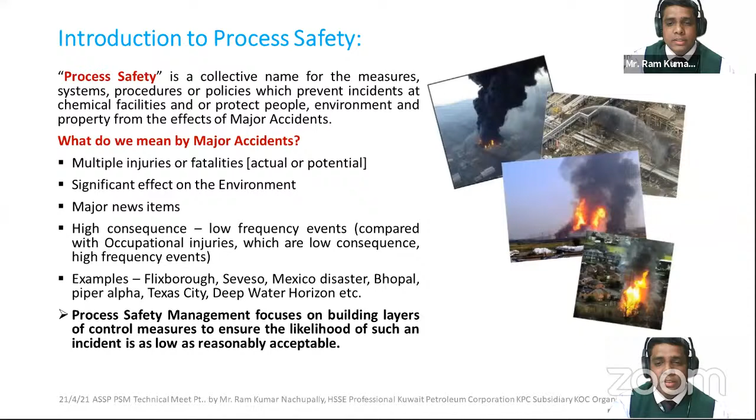Now, with chemical disasters, what comes to my mind is how much the ozone layer is depleted, how the environment is impacted because of chemical accidents and disasters. For our ecology, the impact would be short term and long term, which we have seen in the Bhopal case studies. Even today, with Nagasaki and Hiroshima bombing, we still read and learn from those kinds of incidents which have left major disasters across the world. I'm talking about the scale and depth of human loss. What is important to us? The living organisms. How healthy we live. How healthy is our environment? That is a concern to all HSSE professionals, not just limited to process safety engineers.

I would like to reflect on case studies of some of the major chemical accidents that took place. Bhopal Tragedy, everybody knows, 1984, December 3. The cause of it was simple. Safety systems were not functioning. Many valves and lines were in poor condition. What was the chemical? Toxic chemical methyl isocyanate, 40 tons of which escaped from the Union Carbide pesticide plant. 25,000 people died by 1994. But in the year 1984, there were 2,500 immediate fatalities. After 10 years, we still suffered with injuries and fatalities. Not just limited to the cost, 470 million spent.

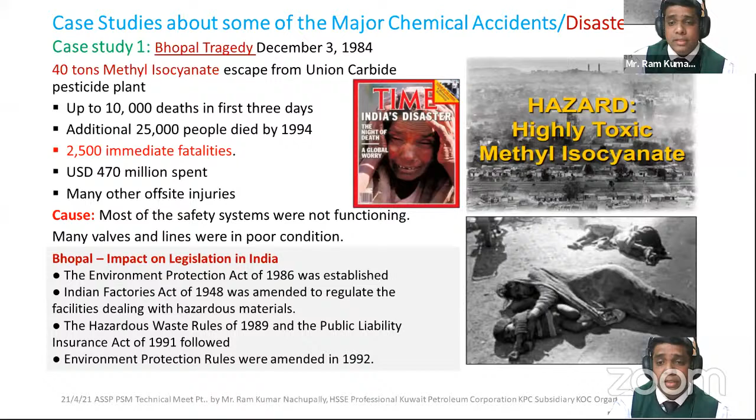And the Public Liability Insurance Act in 1991 followed, based on the waste rules implemented in 1989. Other environmental pollution rules were amended in 1992. So wherever there are disasters, there are always lessons.

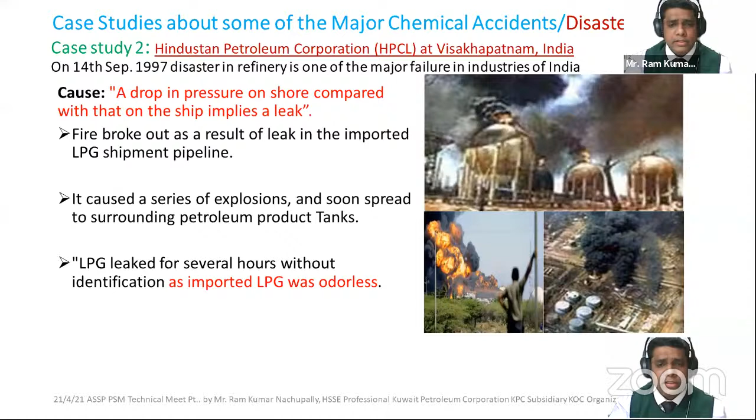The second incident I reflect upon is Visakhapatnam, one of the major industrial failures of India, which occurred on September 14th, 1997. A drop in pressure on shore compared with that on the ship implied a leak, and that leak ignited. Fire broke out, and it caused a series of explosions in the sphere of LPG tanks. Now, what happened? LPG leaked for several hours and nobody could identify it, as the imported LPG was odorless and colorless.

Now, I would like to reflect on the lessons from these two case studies. There are a lot of other incidents like Seveso, Flixborough, Bhopal, Piper Alpha, and gas leaks in Mumbai. But with these two, three causes of accidents come to my mind. One, process analysis: identifying, analyzing, and producing solutions, not dwelling upon the problems, and the same issues when it comes to process safety culture, to commit to the culture. Then implementing the solutions and changes. Any organization that looks into changes with zero incidents as a focus will definitely have remarkable results.

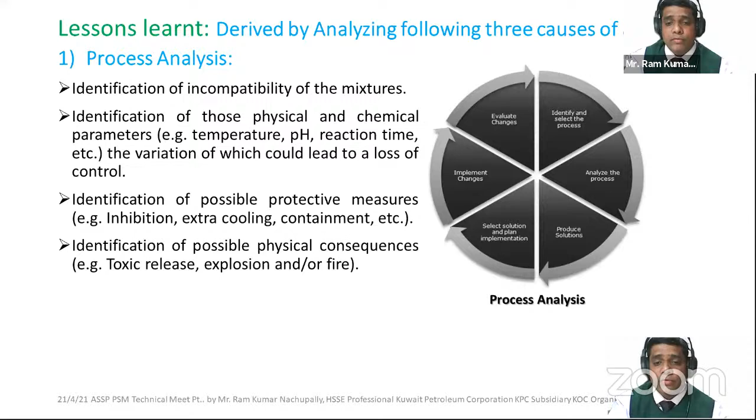So in the lessons, in the process analysis: identifying incompatible mixtures, chemical parameters, possible protective measures in the cooling system, heaters, containments, and identifying physical consequences of toxic releases, explosion, and or fire before it turns into disasters.

The second lesson we can learn from these kinds of disasters is safety measures and controls, and how effective they are. We need to adequately follow safety measures and controls while handling, storing, or transporting flammable or toxic substances. But do not simply choose a control method because it's easy and fast to implement. Your key priority is not PPE or administrative control. It is about engineering control, substitution, and the topmost priority is elimination of oxidizing agents. We have evidenced ammonium nitrate, which happened in Lebanon.

Eliminate ignition sources: static electricity, hot surfaces, and sparks. Critical process sensors and alarms. These are all parameters we need to check regularly and look into how effective they are within our maintenance system.

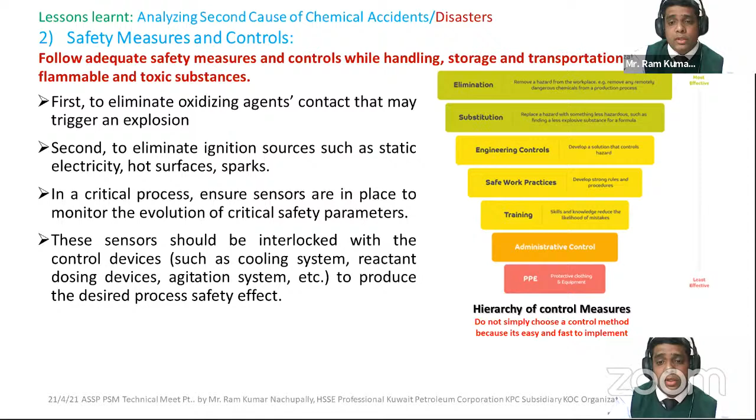Now, I would also like to go through the third important cause of chemical accidents, organizational measures. In PSM, we have 4 items to ensure commitment to process safety. In the Center for Chemical Process Safety, 5 elements are written to lead from top management, embedding process safety as a core value by which we all commit to process safety. 2 elements enable businesses to review information and apportion resources appropriately to understand hazards and evaluate the risk. Third, 9 elements talk about continuing execution of risk-based process safety, how to effectively manage those risks. If you have a high risk, bring it to moderate, and moderate to low.

Identify your risk assessment. Learning from experience: do we learn from experience and share the lessons? There are 4 elements talking about information from incidents, providing feedback on how process safety management is performing. So workers training is key. Housekeeping to be implemented, emergency response, prevention, protection, mitigation, response and recovery, how soon we respond if an incident happens.

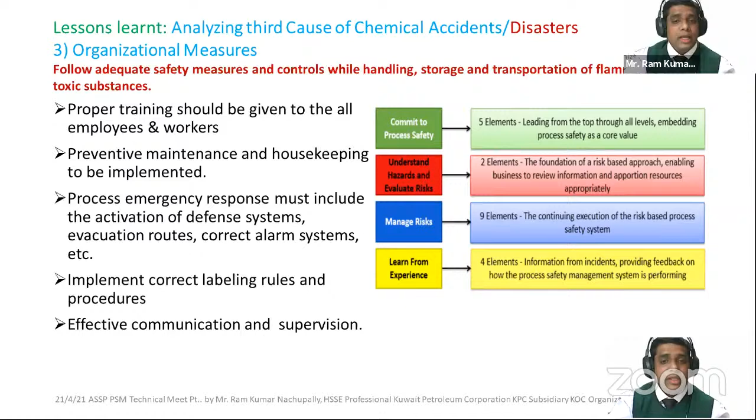That is a key concern as a process engineer. Are we trained? Are workers trained? Are the contractors trained? How effective is our PSM management system? Implementing correct labeling rules, effective communication, and supervision is equally important in maintaining our process facility layouts.

Let us quickly look into process hazard analysis in preventing accidents. We do a lot of process hazard analysis. We look into HAZOP studies, what-if analysis, how we do it, what we do.

Just a second, my screen has gone off. I don't know why, but yes, I'm okay.

Failure mode effect analysis, fault tree analysis. These process hazard analyses are essential tools to determine locations of process safety issues, identify corrective measures, and prepare and validate your emergency action plans effectively if your safety control systems fail.

Measurements and metrics.

Can you hear me, Ramana? I cannot see you. We can hear you, Ramkumar. Okay, I'm going ahead because I cannot see anybody. My screen has blackout. Fine. Okay. Ramana, you can open the slide measurement and metrics if you can see. No, we can see your slide, Ramkumar. Please keep going, sir. Okay. Now I am in the slide measurement and metrics.

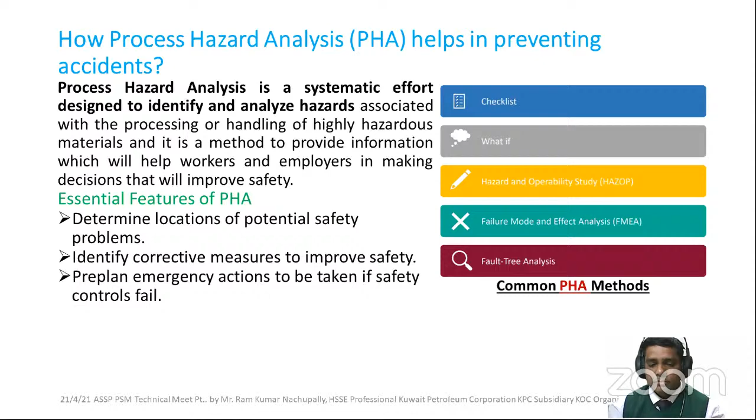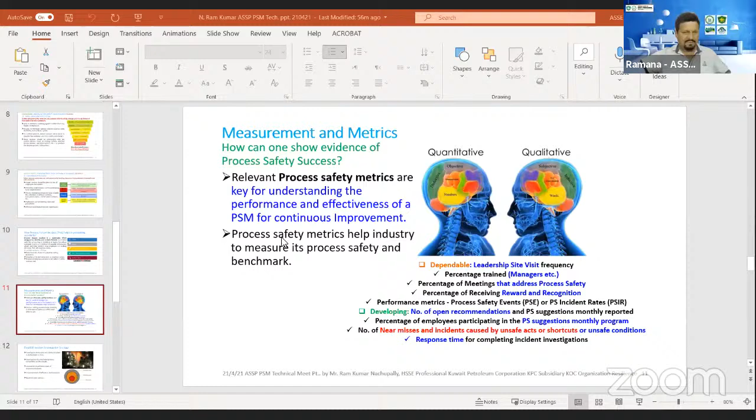Hold a minute. Hold a minute. So what we see here is a PHA slide. Yeah, I will stop it. Maybe, Ramana, you take over and put up the slide measurements and metrics. Okay, thank you. I will say next, then you move on. Keep the slide measurement and metrics, Ramana, if you're okay with it. Yes. If it is there, just say yes, ready. It's not there in that presentation. It's there, measurement and metrics, slide 11. Yeah, okay. Got it. Okay, go ahead. Thank you.

Let me quickly wrap into the measurements and metrics. What comes to your mind when we talk about the qualitative and the quantitative? It is all about our process safety, how successfully we do our measurements. Relevant to process safety metrics, the key things are leading metrics and lagging metrics. Leading are performance based, covering the key work processes, operating discipline, and layers of protection that prevent incidents. In contrast, lagging indicators are a retrospective set of metrics based on incidents and accidents that meet the threshold of severity that should be reported as part of industry practices.

Again, this is the safety metrics. So the challenge of safety systems is all about what we have here: do leadership or managers make site visits? If so, at what frequency? What percentage of managers, supervisors, and process engineers are trained? And the percentage of meetings being held. Our workers, contractors, or people involved in process safety should be suitably rewarded and recognized, because without motivation, safety will not be sustainable. So worker motivation is equally important.

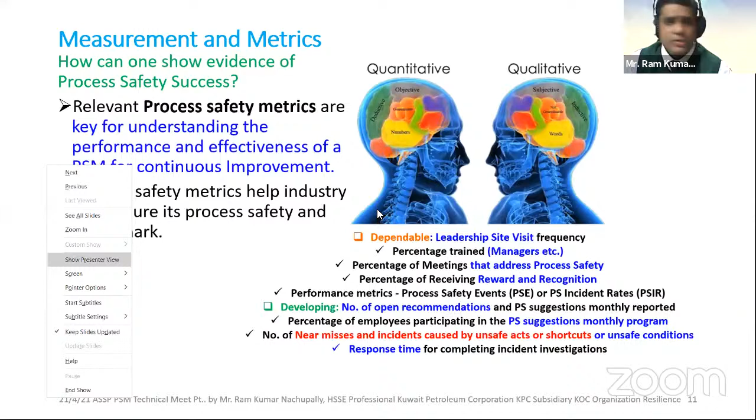Performance metrics can also consider process safety events and incident rates. How many? What is the frequency? Second, we talk about the number of open recommendations and the process safety suggestions reported monthly. How quickly are we closing those recommendations, or are they just sitting on the shelves as paperwork? Are we really concerned about those recommendations to prevent incidents from recurring? Yes, that is the key issue. How many employees are participating and giving suggestions in the monthly process safety program? Each and every employee is unique.

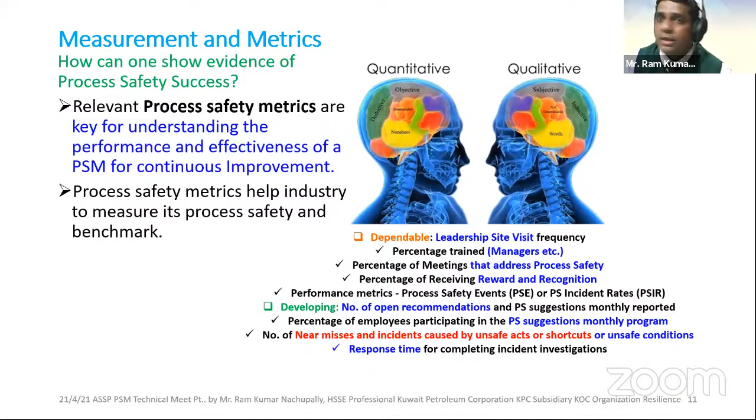Perhaps we can have toolbox talks and meetings where employee suggestions relevant to process safety, from a leak, spill, pipeline, or corrosion, whatever items they identify, are raised. We need to take it seriously and address those issues. Metrics should also go beyond unsafe acts and unsafe conditions. Are the workers following safety behaviors? Are they using shortcuts and unsafe acts in our refinery or operations? How many near misses are reported, and have they been addressed? What should be the response time to complete an incident investigation? These are some of the key metrics or measures we can consider in the process safety elements. Next slide.

Establish an incident investigation strategy. What should the strategy actually be? You see a three-color onion: root cause analysis, incidents, underlying causes, and how we do it. We do what-if analysis, checklists, and involve internal and external auditors to analyze what went wrong and what the actual root cause is. Investigate every process safety incident to determine the root causes. Once you deal with an incident, go through the incident area and site, and measure things and their frequency, we always see the Swiss cheese model. Every incident leaves us a lesson.

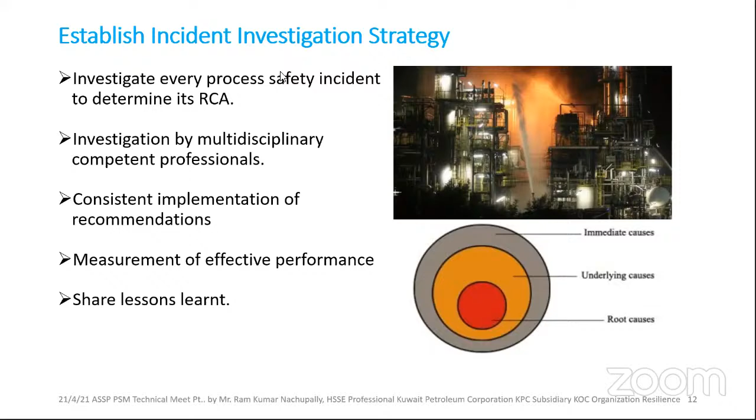Meet the organization's key goals. What is the organization's point of view? No deviation from the document, zero incident rate. Verify the PSM elements and understand why we need to do an audit. It is not just for the practice of doing an audit. It is not just a number, but an improvement. Everything you deal with, each and every component of a process, unit, or facility layout. This is for your continuous improvement.

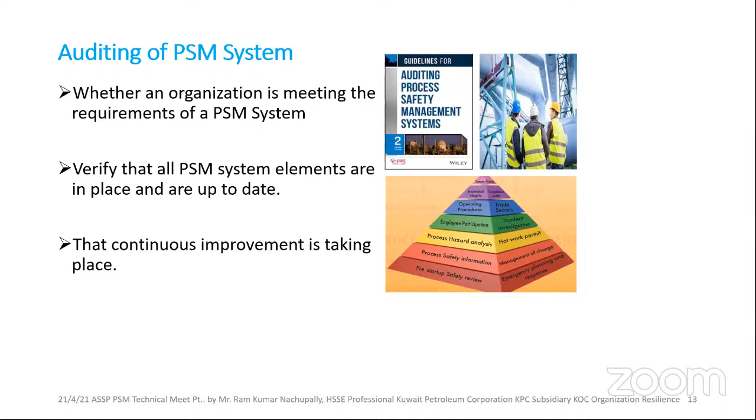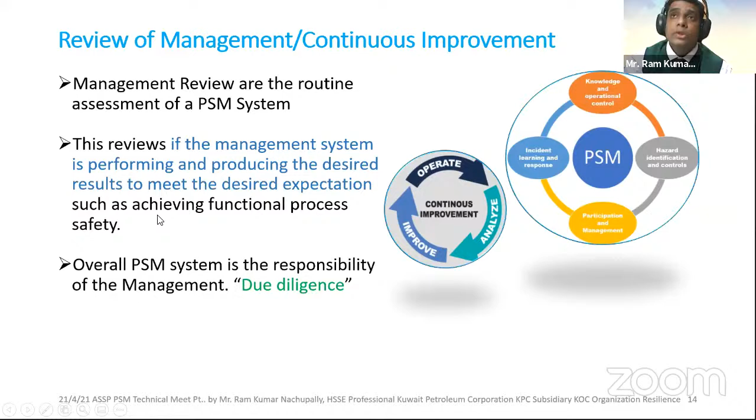Another important element in process safety is management review and continuous improvement. Knowledge is one thing; hazard identification, with that we can control if we have effective hazard identification and control measures. Employee participation, if it's not there, and effective training is not there, your system won't be continuously improved. We will be there where we are.

Incident learning and response are all equally important when we operate, analyze, and improve our processes to improve in the refineries. Review of the management system performing and producing the desired results meets the desired expectations, and functional process safety will only be achieved when you commit to the process safety measures, controls, and safe operation procedures. Overall process safety management is the responsibility of the management. But as we say, safety is everybody's responsibility. Process safety is also equally the responsibility of every individual working in the organization. Perhaps there's administration control, management control, hierarchical control, but each and every one can play a mutual role.

Commitment to process safety - here I would like to emphasize safety culture. We are not pathological anymore; we have evolved, seeing the major disasters and chemical disasters over and again. We are supposed to be reactive, calculative, proactive, and the most important thing, focusing on the generative.

How effective is our safety management system? How effective is the process safety management system? Are we complying with the 20 elements of process safety? How much better can we do with everything around us? Worker involvement, how effective the communication is, and mutual trust and responsiveness.

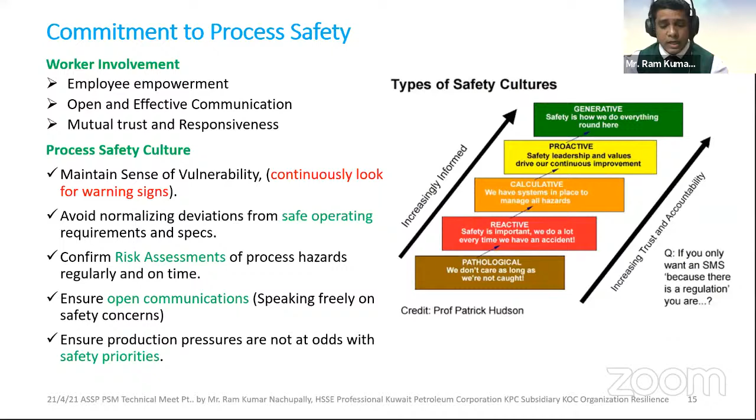When was the last audit? Was there any incident? Yes - what was the lesson, were the lessons learned? Was there any publication on the latest root cause analysis? Were there any refresher trainings? Ensure production pressures don't override safety priorities. Understand the importance of safety culture growth, Ramana.

Let us go to safety audit. Ramana, are you with me? Yeah, it's already there, thank you.

Now, planned maintenance - we always talk about maintenance. Preventable disasters are caused by lack of training, non-operating personnel's safety awareness, lack of motivation, lack of effective recognition of operating instructions, or living in a false sense of security, living in false pride, and focusing only on the public image.

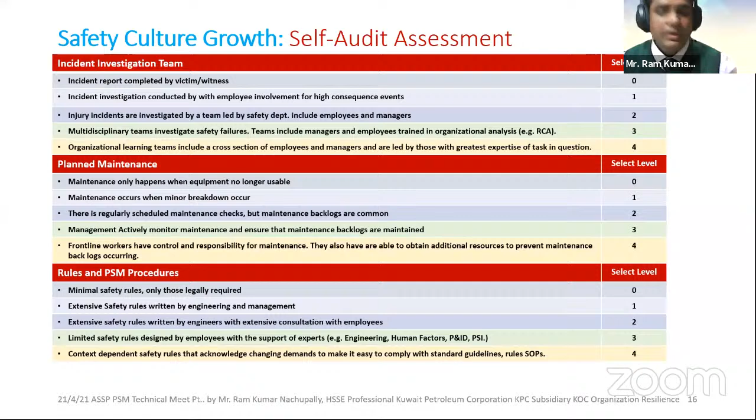And at this point of time, we invite a few questions. We will take before we go get into the next segment of the meeting. I see quite a lot of people from Australia to Argentina. Excellent. I'm happy that this forum is getting popular. People are finding it of some value.

Go ahead, there is a question in the chat box. What are the standards and codes that should be followed to produce effective implementation of PSM?

See the OSHA, first of all, take the OSHA, we have 1910.119. And we can always refer to the Center for Chemical Process Safety. Any elements, 20 elements are equally important. We do not prioritize that this element is important, or that other elements are not important. All elements are important. I suggest to refer to the OSHA 1910.119, Process Safety Management, or refer to risk-based process safety, which has clear guidelines based on Center for Chemical Process Safety.

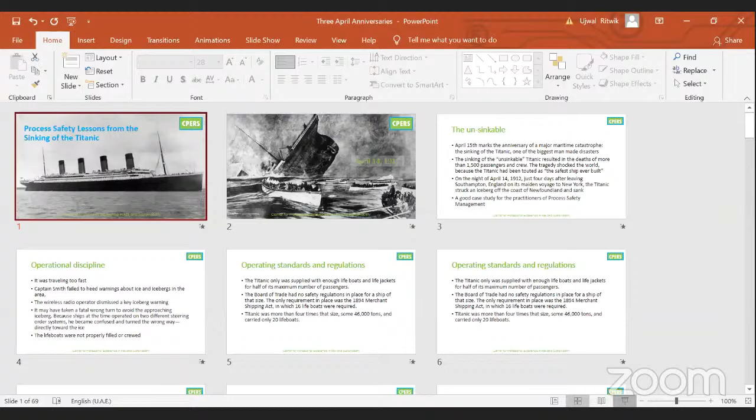Yeah, so this is the ship which was more than 800 feet long, and my story starts with this. Now when you see a ship, you may not connect it to PSM or process safety. But I told right at the beginning that even though something, an incident or a project or a program, may not be directly connected with process safety per se, still when an incident is analyzed, we can infer some connectedness or at least some learning from a process safety point of view. That is what I had promised at the beginning.

Now I added this section on Titanic because it happened that the 15th of this month was the unfortunate anniversary of this unfortunate incident.

So we are talking about process safety lessons from the sinking of Titanic. This is, I believe, an actual photograph and not a painting.

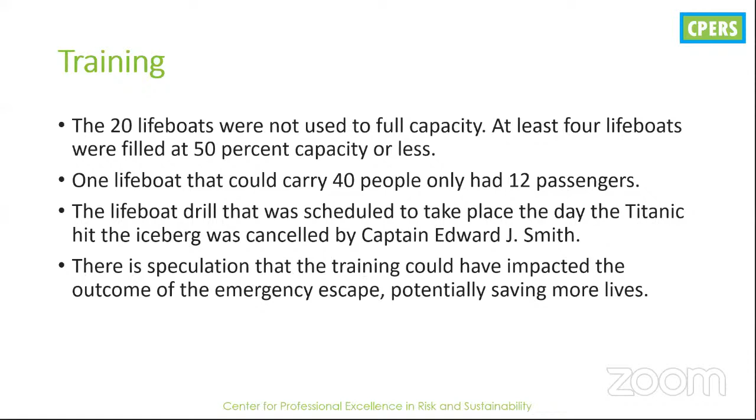I have seen people not being given simple detectors like a personal H2S detector. Now, this is a very inexpensive instrument nowadays. There was a time when I started my career when it used to be a very expensive, bulky device, difficult and not very practical to carry around.

Nowadays, it is the size of a matchbox, a small matchbox. Anyone can carry it anytime, it can be used, and after 3 months of use it can be thrown away, even after 6 months of use. It can be replaced cheaply. Still, people are not being given them. So we are talking of safety devices, emergency backup.

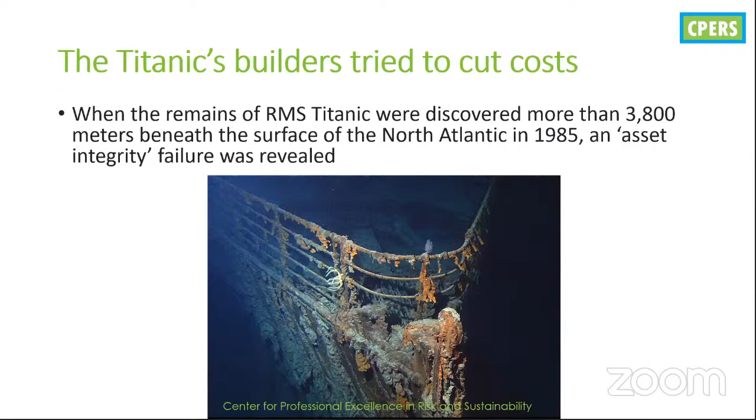At that time, there was no welding. So the two steel plates were not welded, but they were riveted. And rivets are something like this, wherein one end is inserted through the holes in the two sheets. They are aligned, and the rivet is inserted, and the other end of the rivet is made hot almost to the melting point, and then hammered with the help of hydraulic hammers. So it becomes rounded, and then it seals.

If you see any of the old-time equipment, or even in the pictures, you will find that rivets like these were very common, be it storage tanks, ships, or even railway bogies. This is how the steel plates were joined before the welding era. Titanic used something like 3 million rivets because it was made of steel. At that time steel was a little different quality, but still it was steel. 3 million rivets were used.

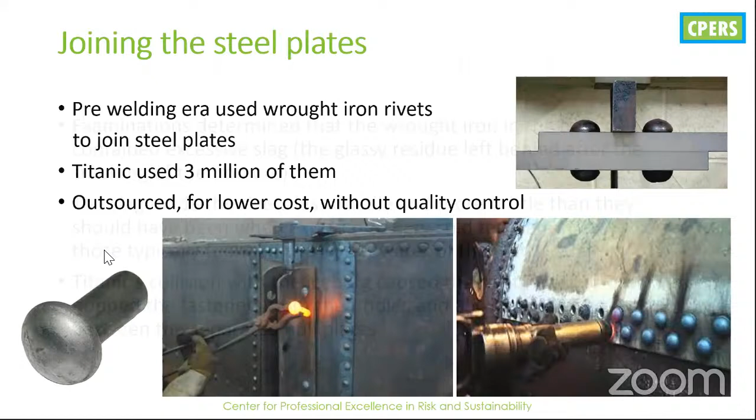And because of that, no sooner had it hit an iceberg, the Titanic's collision with the iceberg caused the rivet heads to break off, popped the fasteners from their holes, and allowed water to rush in between the separated hull plates. This is something that has come to light only in the last 30 years in this great detail.

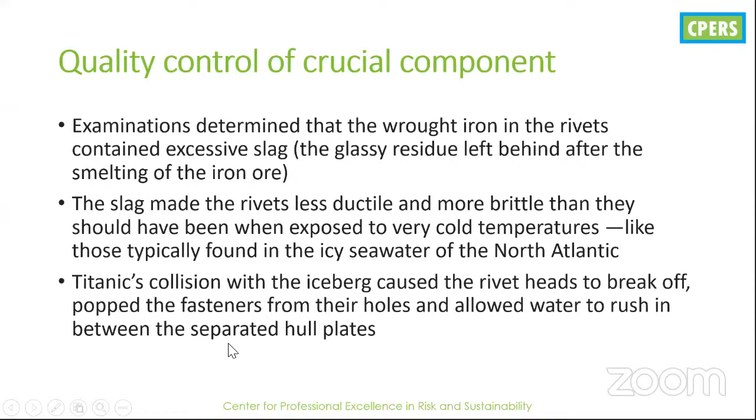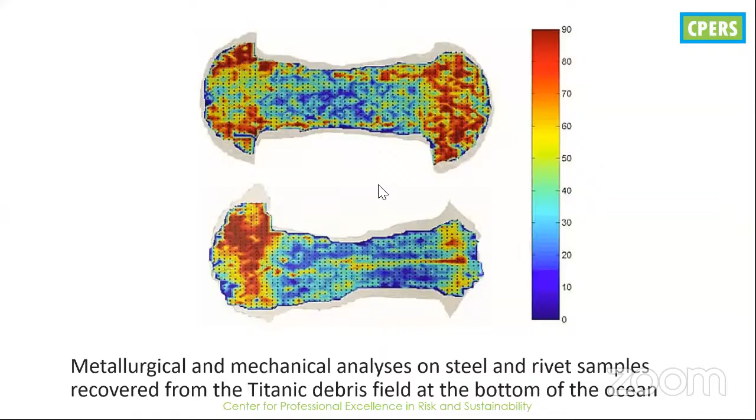For example, this is a metallurgical picture of one of the rivets that was found at the bottom of the ocean. And all the red spots that you see are slags, or the more brittle part. And you can see that so much brittleness was there in the rivets. This is how the picture shows that when the rivets were hit by the iceberg, they popped open and water gushed in.

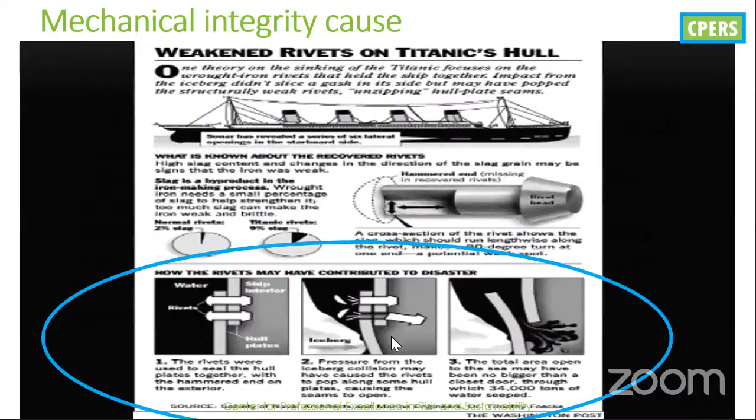So after that, a lot of things have happened. Many of you are aware of SOLAS, the Convention of Safety of Life at Sea. Many of you are using it, and then the North Atlantic agency to look for icebergs, etc. That is not the focus. I just want to bring attention that there is a PSM, asset integrity or mechanical integrity issue to this.

Let's go to another incident, and this is, as I told, Deepwater Horizon. Process safety management deficiencies. Again, I'll be quick because time is running out for our meeting. This happened on April 20th, not very long back. Many of you remember, because it was day in, day out on international TV, how the oil was bubbling, leaking from whatever was left of the oil rig at the bottom of the oil well, from the ocean floor.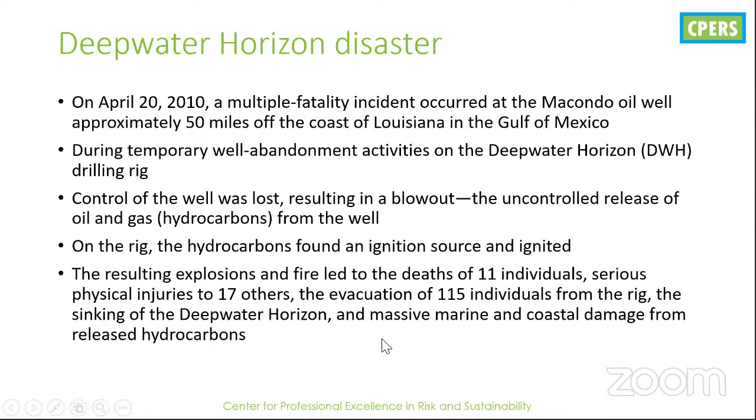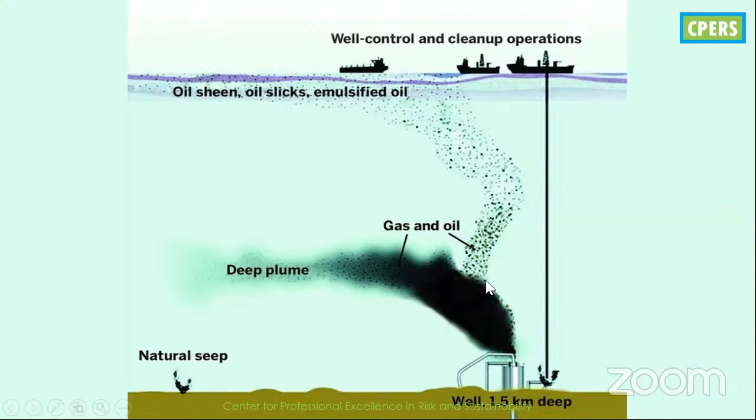And of course, all the rest of them had to be evacuated. Some of them, of course, jumped into the sea and they were fished out of the water. Apart from that, there was a huge marine pollution backlash. In fact, this incident would be known for this oil pollution. At least until now, this has been the largest pollution that we have known in our oil and gas history.

This is what we have been seeing day in, day out on the TVs all across the world. And this has been the unfortunate picture of disaster. This is how the disaster unfolded on the southern coast of USA. BP was the main operator. However, the rig itself was operated by the drilling contractor, which was Transocean.

The name of the rig was Deepwater Horizon in the Gulf of Mexico, at a location called Macondo. Let me read this. The Macondo blowout has illuminated the potential severity of consequences from a single offshore incident and has served as a catalyst for examining major accident risk management in the offshore drilling industry and even the onshore drilling industry.

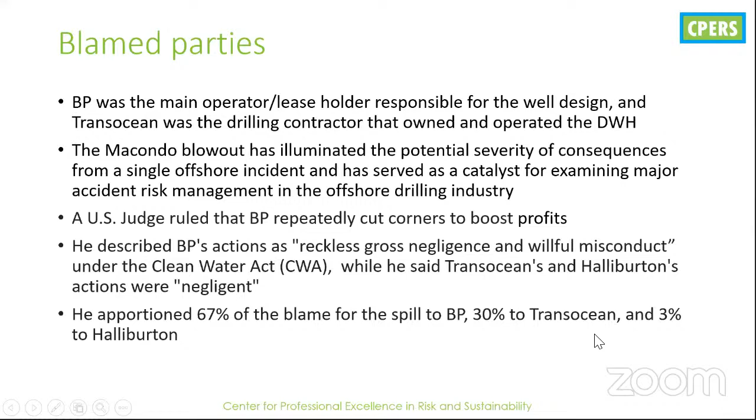A US judge ruled that BP repeatedly cut corners to boost profits. He described BP's action as reckless, gross negligence, and willful misconduct. But even others like Transocean and Halliburton were also negligent. And therefore, he apportioned 67% blame to BP, 30% to Transocean, and 3% to Halliburton. Altogether, 184 million gallons were spilled out. And at the end, it has cost BP something like $65 billion. And even other companies suffered.

Key investigation. The Chemical Safety and Hazard Investigation Board was assigned the investigation in July, not in April. Normally, they are brought in for investigation right away, but in this case, only later was it recognized as an incident worthy of CSB investigation. They found some technical factors: safety critical systems responsible for shearing drill pipe in an emergency. This was one of the technical factors.

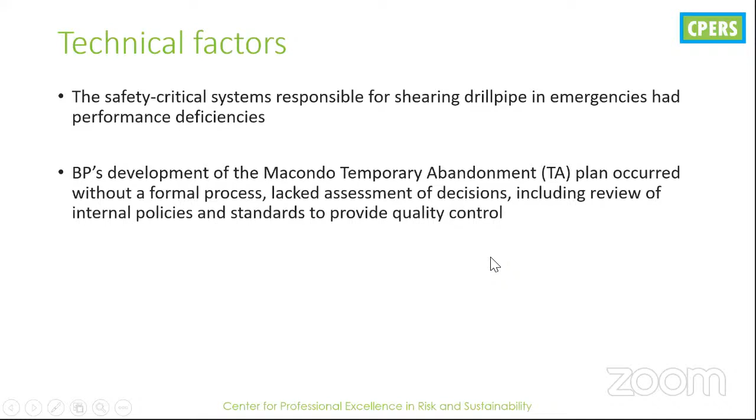Another very important technical factor was the temporary abandonment plan, which is normally done for any oil rig. The TA happened without a formal process. Many of you who are in upstream would be wondering how this happened, especially with a company like BP. They lacked assessment of decisions, including review of internal policies and standards to provide quality control. So these were the technical factors.

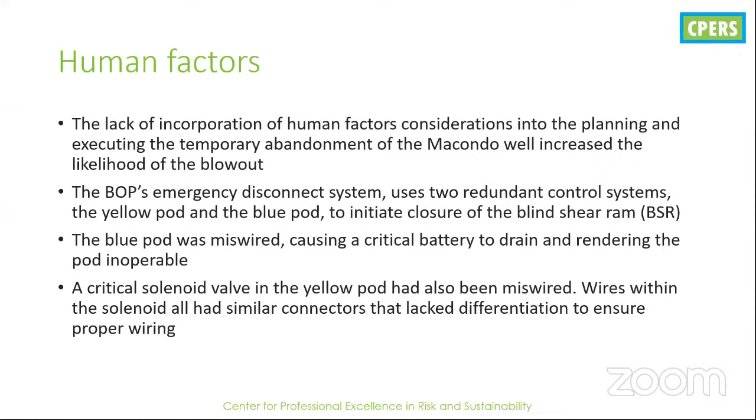There were human factors: lack of incorporation of human factors considerations into planning and execution. Here in human factors, I would like to mention that there were two devices. I won't get into the details; there is a very good video available on the CSB website. These two devices were miswired. That is how human factors in maintenance come into play. How small things, in the last incident we saw a small thing like a rivet, here a small thing like a solenoid being miswired, played such a vital role in this incident.

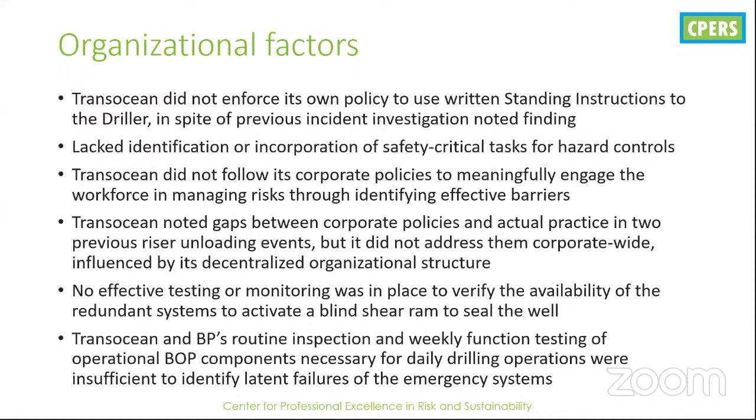There have been several organizational factors with BP, with Transocean, even with Halliburton. All these details are given here. Risk assessment. The interesting part is that both BP and Transocean, the contractor, had corporate policies on risk management, a very structured process for risk management. However, when it came to working together, they did not practice their own policies, their own procedures on risk management in this case, which is surprising, but that resulted in this unfortunate incident.

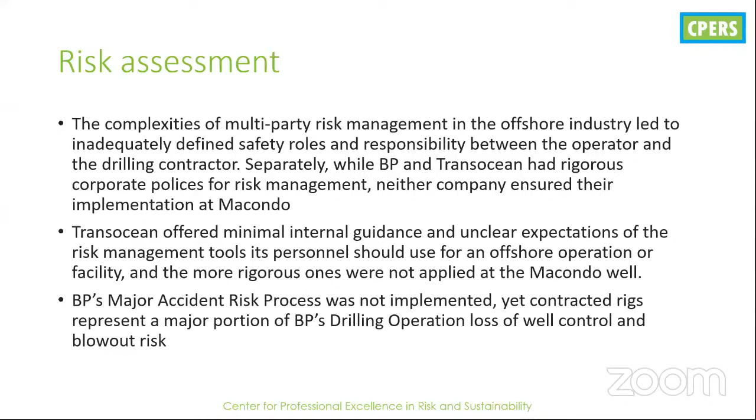Safety culture, an out and out safety culture issue. We will talk about safety culture when we are talking about the Chernobyl incident. In fact, the term safety culture was coined when they were investigating the Chernobyl incident. And lack of safety culture. In Ram Kumar's presentation, he talked about the 5 stages of safety culture. In fact, CCPS, in their risk-based process safety management, has a whole section about maintenance of safety culture. This was the case even in this 2010 incident.

Regulatory factors: lack of regulatory factors or absence of regulatory factors. In all the 3 incidents we will see, in Titanic, in Deepwater Horizon, as well as in case of Chernobyl, lack of enough regulations. Many people shout, especially in the free economies, in the free world, that there is too much regulation. This permit, that procedure, this form, this policy, but sometimes they are required.

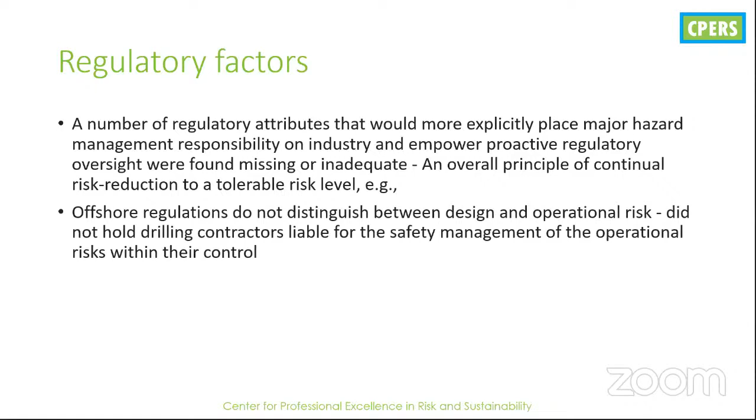In a society, to have an incident-free society, we may require the right regulations, a balance of regulations. There was not enough regulation in the offshore in the Gulf of Mexico. So let's get into the recommendations, and you will find an immediate connection to process safety.

One of the recommendations is about the requirement for managing safety critical elements and developing guidance. This recommendation was directed to the Bureau of Safety and Environmental Enforcement in the Department of Interior of the USA, that they should be doing this. Again, let me tell you that CSB recommendations are not binding. They are recommendations, and they can be challenged.

They can be, sometimes they are very much just recommendations, and agencies or parties involved can say that no, we cannot implement this because of such and such reasons. So another recommendation is to API, American Petroleum Institute, which is again a trade association, not a safety association.

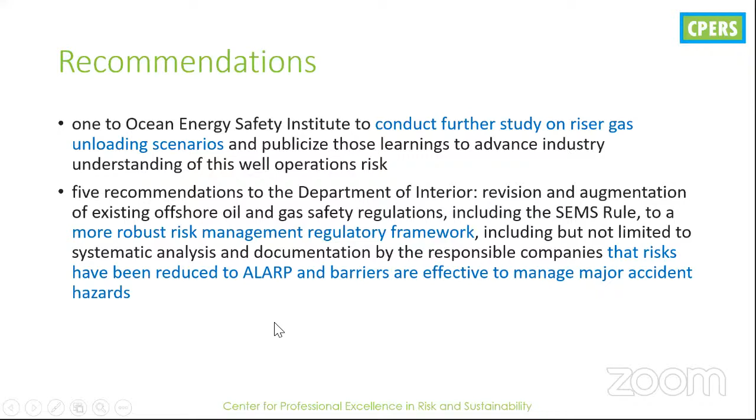And we now talk about safety management systems. So there were altogether about 50 plus recommendations, all alluding to process safety. Now let's talk about specific issues raised. Multiple safety management system deficiencies were there in both BP and Transocean as they implemented on Deepwater Horizon. And these deficiencies were highlighted, for example, safety metrics.

In fact, like in the BP Texas City refinery explosion case, here also the investigation found that BP and Transocean had won several safety awards before this incident. How come? Because all these awards were based on lagging indicators not of process safety, but of personal safety. That is, million man hours frequency rate, etc. So again, they failed to measure the right things. They were measuring something else while the award was being given for safety.

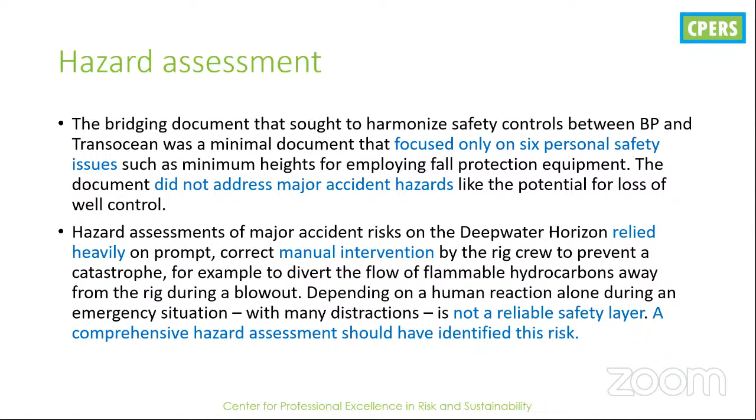The control measures were mostly manual interventions. So if you go back to the pyramid of hierarchy of controls, you will find that manual interventions are one of the less effective controls. We need to go for higher or more robust control, like, for example, inherently safer layers or maybe engineering control, etc.

Operating procedure. There was no operating procedure for how to conduct the negative pressure test, which was being done at that time. Can you imagine such a crucial piece of process going without a written procedure? Again, even in the OSHA PSM standard, having written procedures is a requirement. But here it was not done.

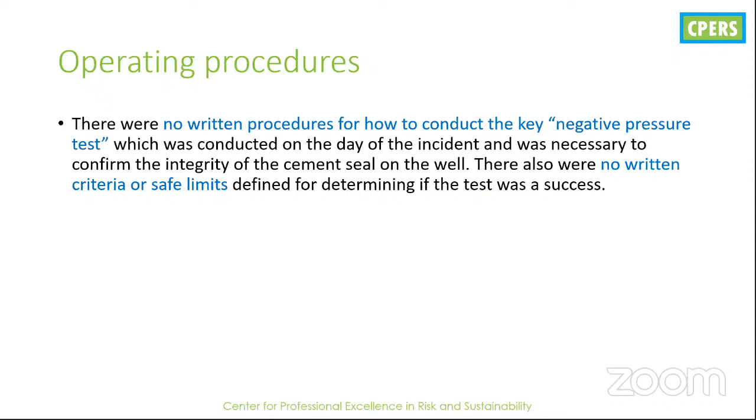Management of change. They kept changing the procedure so many times during the week. That means at the spur of the moment, as it came to their mind, they changed the procedure. So this is how, without a formal hazard assessment, changes were done. MOC was not followed. Again, OSHA 1910 PSM standard.

Systems for investigating safety incidents were inadequate. They had a previous incident similar to Macondo, but it was not communicated. The incident was investigated by Transocean, but they did not communicate it. If you remember, in the Texas City refinery incident, a similar thing was there. There were 3-4 similar incidents happening around BP facilities, but the results were not communicated to BP Texas City.

On Deepwater Horizon, BP investigated a similar incident on the very well itself, but Transocean did not implement the investigation findings. So these are some of the learnings from past incidents, and the learnings were not implemented. Then why did they investigate?

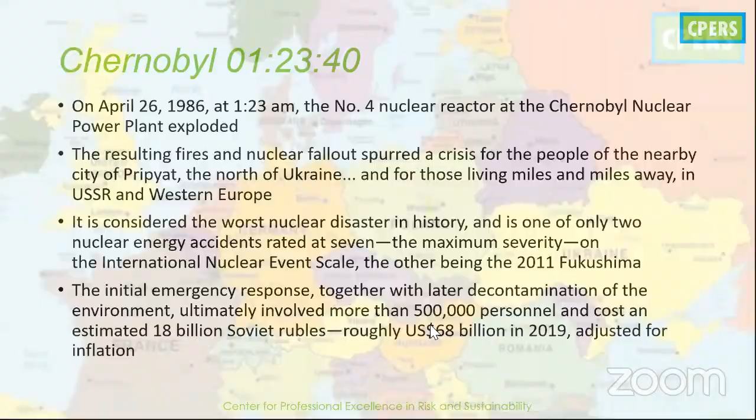The initial emergency response and later decontamination of the environment ultimately involved more than 500,000 personnel. They were involved in decontamination, and it cost almost 18 billion Soviet rubles, which is currently about 68 billion US dollars. Very expensive. But more important than that is the human life lost and the eternity we are talking of for so many years.

So this is what we call Chernobyl in the north of Ukraine. And this is Belarus, Lithuania, etc. They were at that time part of the Union of Soviet Socialist Republics. And then Poland. And here is Iceland, Denmark, Germany. So here you see Norway, Sweden; all these areas were affected to a greater or smaller extent.

This is unit number 4. There were 4 units, 4 plants within the facility. And this is how that particular type of nuclear power plant operates. I don't want to get into the details. The only thing of significance that I want to tell you about is that the nuclear reactor is controlled by, among so many things, putting control rods inside.

So number two are the control rods. These black things you see are control rods that go down when we need to control the reactivity in the reactor. Meaning the more they are inside, the less will be the reactivity. However, there was a catch, and we will talk about this, that special design feature.

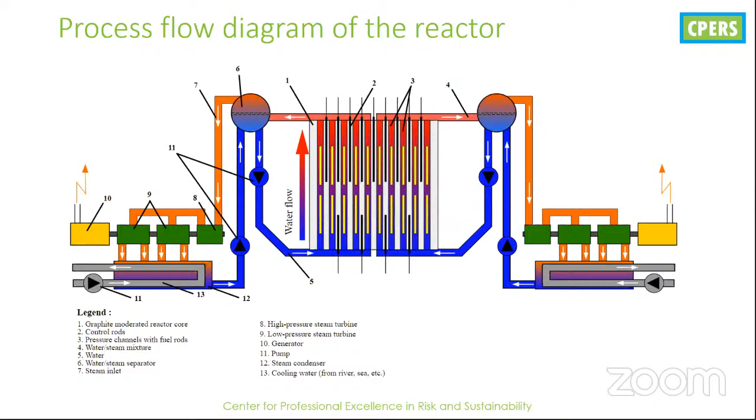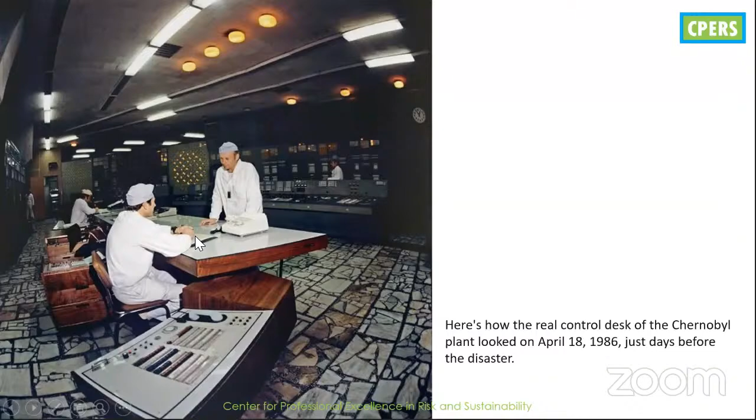There was an explosion, a major explosion, and the facility kept burning for almost 10 days. Firefighters were fighting the fire. In fact, many of the initial firefighters were unaware of the radiation. And that is why they lost their lives, because of the radiation effect.

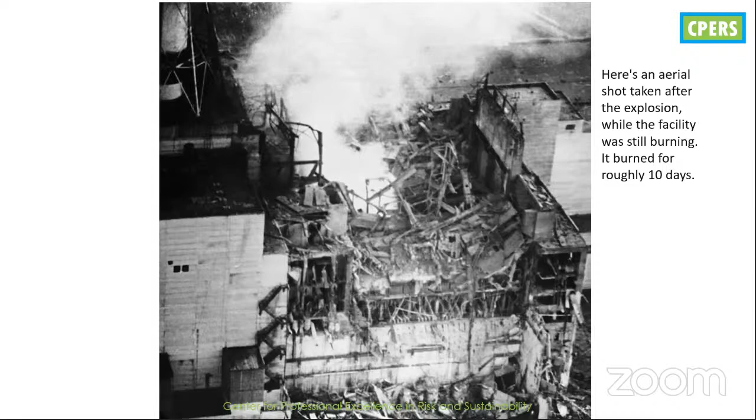In fact, initial Western media reported that something like 2,000 people were dead. However, that was not correct. It was more Western media propaganda against their adversary, which was the USSR. It was kind of the height of the Cold War at that time.

So this was how the British newspapers reported. Obviously, it was not correct at that time. Although 20,000 people are considered to be dead by this time, these are chronic effects of radiation, not immediate effects.

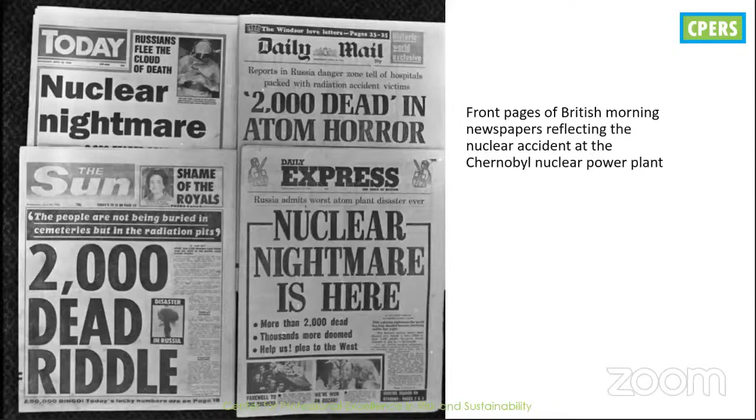People, they were called liquidators. Liquidators were more like human robots. They had been brought from the army or reservists to remove the fragments of exploded reactor graphite, and they could remain only for some time, only 40 to 45 seconds.

If some of you have seen a movie from HBO, or Sky, they have made a wonderful movie out of this, based on this incident. The liquidators were very ill prepared, very ill. Their PPE was very primitive, and they went there to remove the radioactive debris to make the whole thing less hazardous.

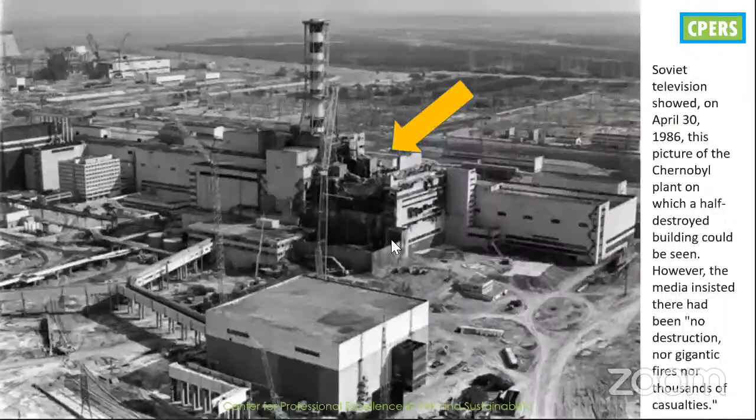This is how the Soviet television showed it, and they said there was no destruction or gigantic fire, which was again not correct. It was more misinformation, propaganda.

But one thing was very important that we need to emulate. You need to see that movie or read the literature. The evacuation was decided much later.

It was not immediately decided because the authorities didn't want to accept it, until Sweden, as far as Sweden, reported an increase in atmospheric radioactivity. Then only did the Soviet government acknowledge it.

But at that point, even though the decision to evacuate was delayed, a huge evacuation, a very methodical and systematic exercise, was done. This is a learning exercise by itself. Okay, it was delayed, much delayed, but we need to learn how a good evacuation could be done.

And that is where people, those of you who are more into evacuation and emergency response, I would take you there—read about it, go down this discovery route.

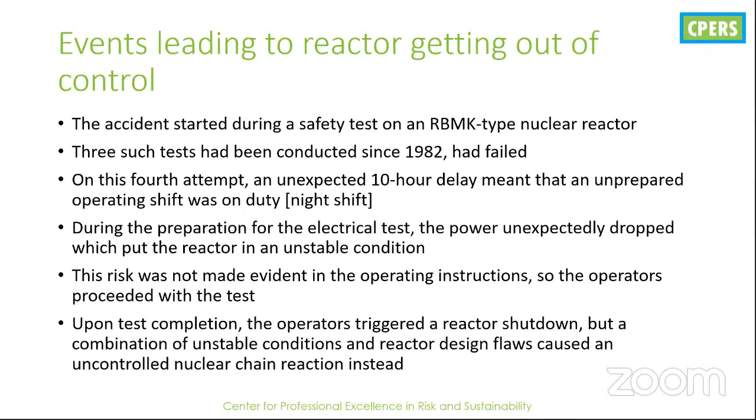Let's see further. A large amount of energy was suddenly released, and two explosions ruptured the reactor core. An open-air reactor core fire followed, with 9 days of rains across the USSR and Western Europe, to the west, because of the wind direction. This is the radioactive fallout, as they call it—rain containing radioactivity.

Finally, the whole thing could be contained by 4th May 1986. A massive emergency operation to put out the fire, stabilize the core and the reactor, and clean up began.

The reactor explosion killed two of the reactor operating staff immediately. In fact, until now, nobody knows exactly what happened to them.

134 station staff and firemen were hospitalized. Out of them, 28 died almost immediately, and a further 14 followed. The total eventual number of exposure-related deaths is anyone's guess—models estimate as many as 20,000 or 16,000 fatalities across Europe.

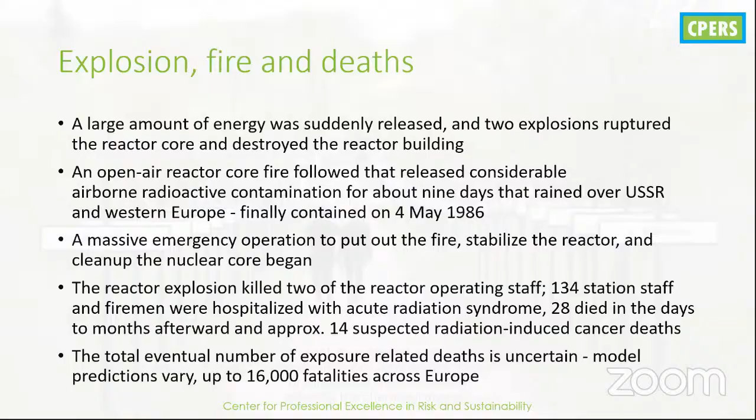This is how tourists now walk around Chernobyl. An exclusion zone of 10 kilometers initially, and then 30 kilometers afterward in radius, was made for evacuation. Even today, radiation levels are too high within that zone, even in surrounding areas, and nuclear cleanup is expected in this area by 2065.

Just imagine—many of us won't survive to see that. That is why radioactivity is so dangerous. We cannot see it, but it is around us. The estimate for when the site would be considered habitable again is 20,000 years, or sometime even more.

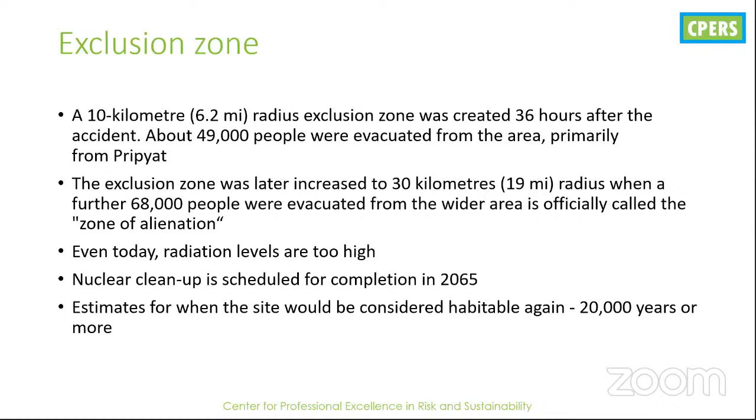That means people may not return to those areas in 20,000 years. And these are the exclusion zones. And this is one of the effects, the radiation effect on animals in that area.

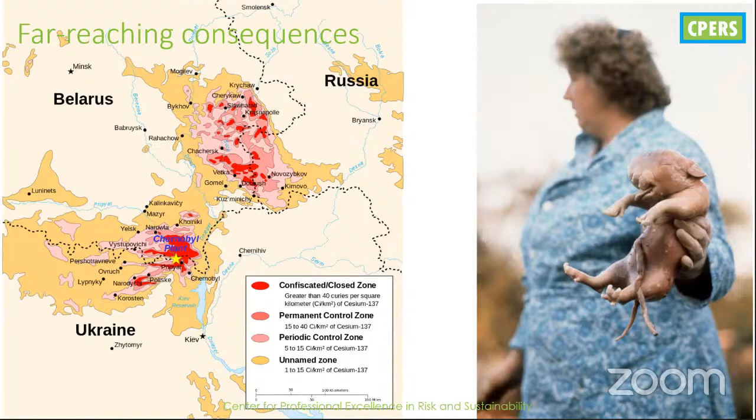The new births, a newly born animal, I don't know what animal it is, possibly a dog, a puppy. This is how they are affected, the newborns.

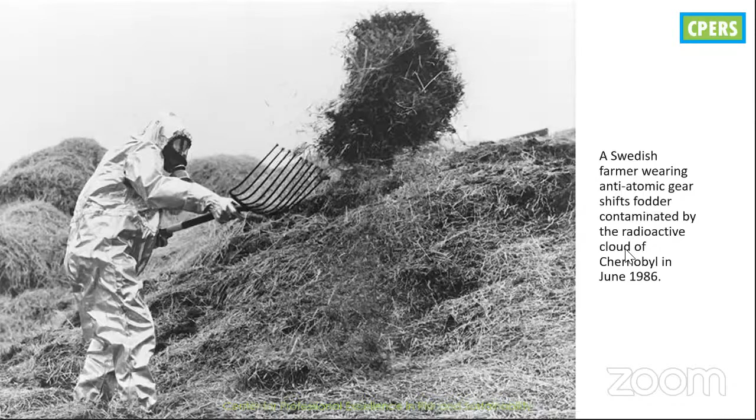Environmental impact, water bodies, flora and fauna, human food chain, you name anything and everything, abortions, cancer, long-term radiation effect, socio-economic impact, waste management. What is the humongous waste management exercise that must have followed?

So, lessons for process safety. This is my last part. Some of you who are getting impatient, have some patience, and we will conclude very soon. There are lessons that extend beyond the nuclear industry and beyond the Soviet Union.

Lessons are directly applicable to today's international chemical industry, PSM. The main cause was the reactor design. Apart from reactor design, the reactor control design was very much faulty. What was that? When you put the reactor control rods inside, it should stop the reaction.

However, the control rods had something at their tip, called graphite tips. The control rod itself is made of boron, which controls the nuclear reaction. Good, you introduce boron and the reaction stops. However, at the tip of the rod there was graphite, for various design reasons.

And one of the reasons is cost cutting. The cost cutting reason was that they put graphite at the tip of the control rod. And graphite actually increases the reaction, it increases the nuclear reactor activity.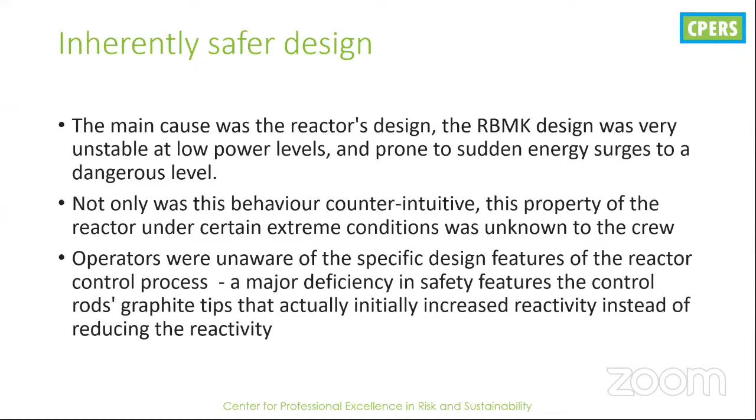And that is the reason the reaction, when the shutdown button was pressed, the control rods went inside and increased the reactivity instead of immediately shutting it down. And that caused a huge reaction and increase in pressure and explosion. Of course, there were other reasons also, but I don't have time to explain all that.

Now, let's come to the point, contributing factors. What is the PSM connection? Standards: the plant was not designed to safety standards, and they did not have enough safety features incorporated.

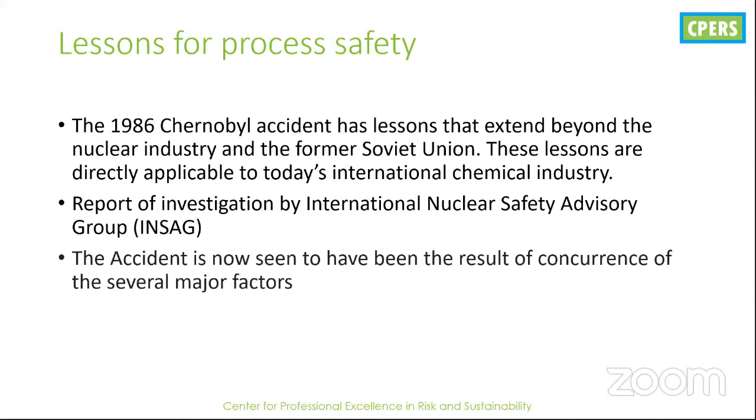And I am not telling this, this is being told by someone called INSAG, the International Nuclear Safety Advisory Group. They investigated the incident. In fact, the Soviet Union, at that time USSR, opened gates to this neutral investigative agency, and they came out with this finding, that standards were not good enough.

Now compare with your PSM, your plant standards, your mechanical integrity standards, your asset integrity standard. PHA: inadequate safety analysis was performed. There was not enough hazard analysis, not enough process hazard analysis. In fact, there was hardly any documentation on that.

Safety reviews: there was insufficient attention to independent safety review. There was not enough independent regulatory body to monitor or review the safety features or safety plant design, etc. Operating procedure: as we have already seen, there was not much written procedure. Process safety information was not adequately and effectively communicated between operators, and between designers and operators.

Designers did not communicate to operators. That means the design manual, the design basis, the design features - the actual operating staff were not informed of, or possibly they were not trained on.

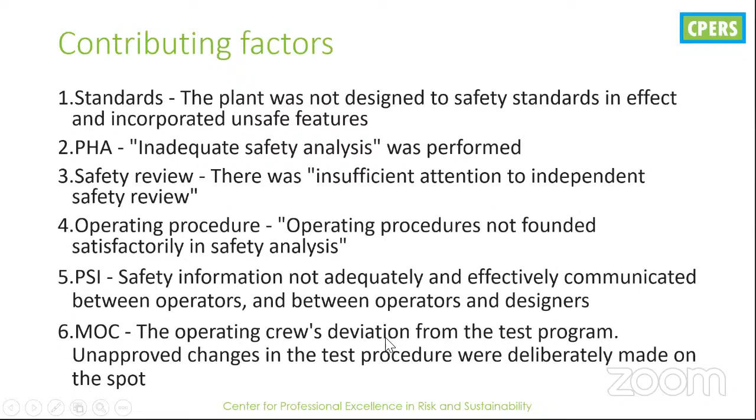Management of change: as we have seen, many of the decisions were taken during that night shift, or immediately prior to that night shift, because they were running late, behind schedule. Training: the operators did not adequately understand safety aspects, especially the control aspect I talked about in detail.

Operational discipline was not enough. The regulatory regime was insufficient, even though it was a communist country, communist bloc, where the regulatory regime was normally considered to be very strict. Still, the regulatory regime was not good enough.

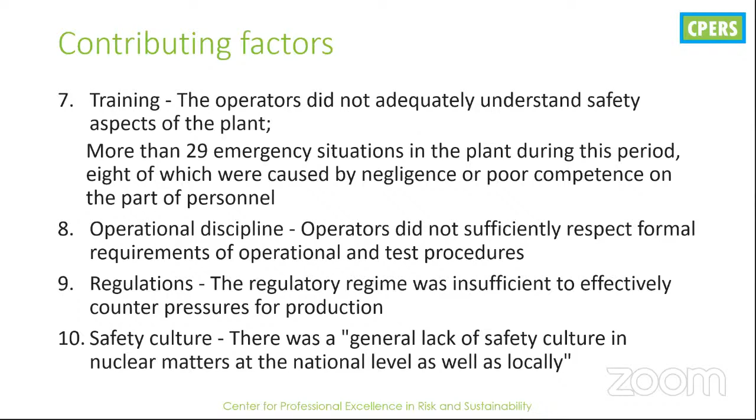And finally, coming to safety culture, let's look into more about safety culture. In fact, it was this INSAG group, that international group, that first coined the term safety culture, which gradually came into process safety also. And that is how CCPS, in 2007, in risk-based process safety management, gave a whole lot of detail on what is safety culture, process safety culture, and how to improve it, how to implement the program, etc.

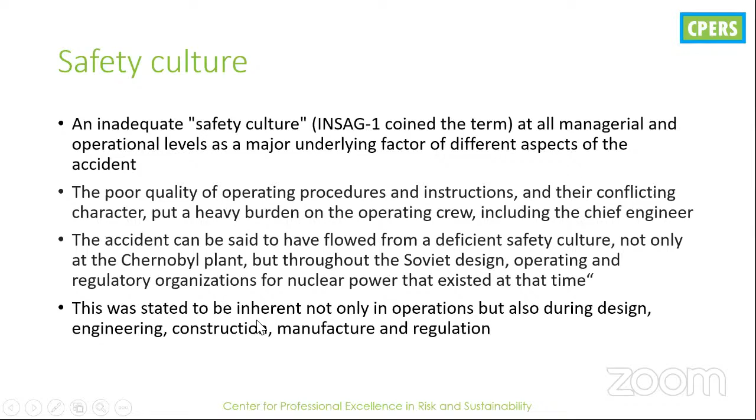Poor quality of operating procedure, accidents can have flowed from a deficient safety culture. And it was not restricted only to operating culture, but even during design, engineering, construction, manufacturing - every layer, the investigation found that the culture was missing. The safety culture was lacking in one way or other.

And this has been reconfirmed by none other than - I would like you to see the person who wrote this. His name is Mikhail Gorbachev, Nobel laureate. He was the president of USSR when this incident happened. And 25 years later, he himself wrote this article. It is an interesting article, and all of you can gain from this.

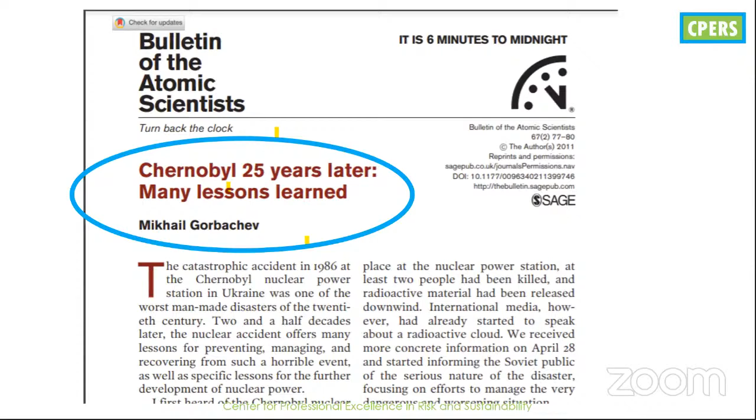Now I will end with these two slides. I know I have taken a lot of time, but I thought some of you who are deeply, keenly interested will definitely like it, especially those in a time zone that suits them.

Common lessons from the 3 April incidents. I have tried to gather what was common in Titanic, Deepwater Horizon, and this nuclear power plant disaster. All three in 3 different industries, not chemical or petrochemical by itself, but they had something for us as PSM practitioners. Common themes: artificially imposed deadlines.

Titanic was running too fast. Deepwater Horizon, they were behind schedule. And Chernobyl, they were behind schedule. They wanted to catch up.

Simplified targets in complex environments will lead to perverse incentives and unintended consequences. In all 3 cases, the crew, the shipping company, BP, Transocean, even Halliburton, and in Chernobyl, the people operating and managing, they wanted to get promotion, they wanted to get credit out of it. So their incentives were counterproductive to safety, to the very safe operation of the business.